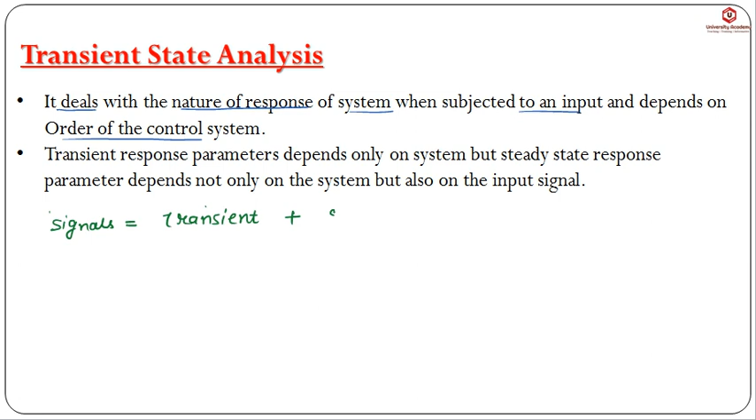ट्रांजिएंट स्टेट एनालिसिस। Transient state analysis deals with the nature of the response of the system when subjected to an input, and it will depend on the order of the control system. In the previous lecture I have told you that signal has two parts, that is transient and steady state. When the transient dies out, the circuit will reach the steady state. So the transient response parameters depend on the order of the control system, and steady state response parameters depend on the type of the system.

What is order? जो characteristic polynomial होता है उसमें जो s की highest power है it will give the order of the system. So it is obtained from the characteristic equation which is 1 plus GH is equal to 0.

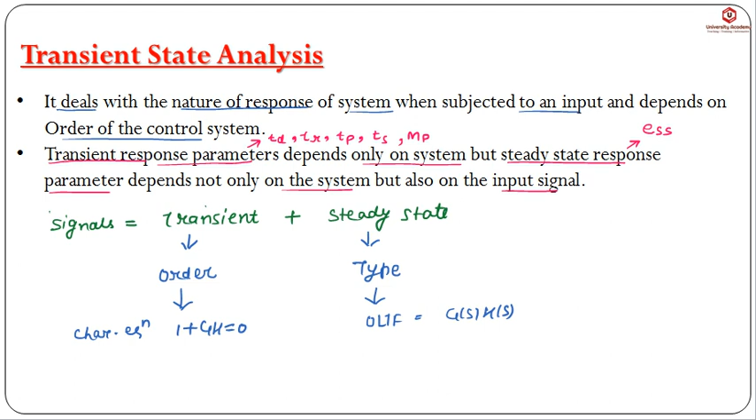Whereas the steady state response parameter is steady state error, represented by Ess. It depends on the system as well as on the input signal we are applying. We will discuss all these parameters in detail. First we will discuss zero order system.

This order of the system also gives us the information about how many energy storage elements are present in the system. जैसे अगर zero order है it means there is no energy storage element present in our system.

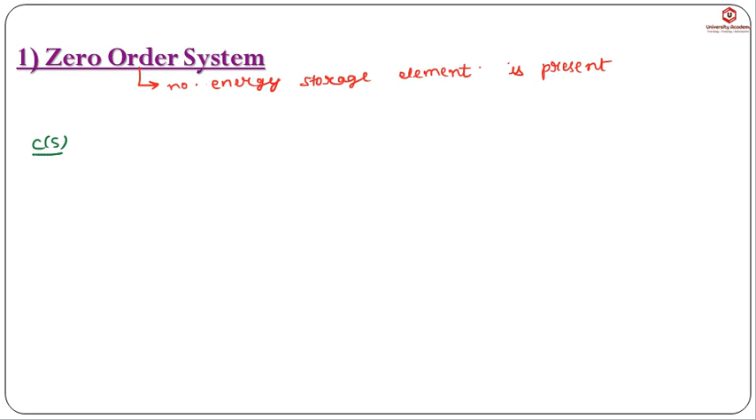So no storage element is present in zero order system. We know that the generalized form of the transfer function, C(s)/R(s): suppose the numerator is constant, and the denominator of the closed loop transfer function gives the characteristic polynomial. Suppose it is of the form a_n s^n plus a_(n-1) s^(n-1) and so on up to a_1 s, and the constant is a_0. So this is the general form of the transfer function where the denominator indicates the characteristic polynomial.

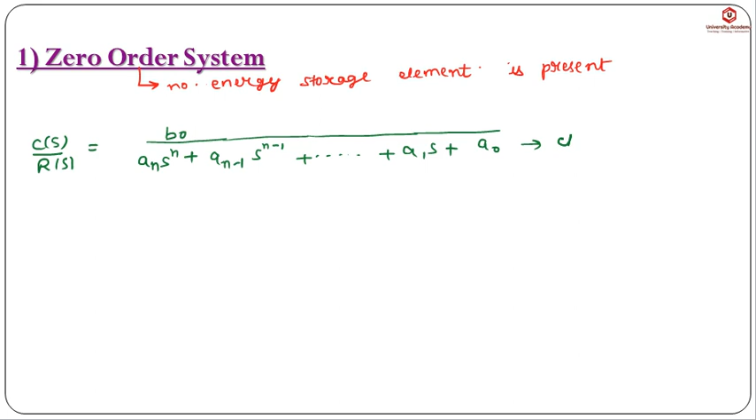So this is the form of the transfer function for the zero order system. This b0 by a0 indicates the gain, represented by K. So K is the gain. If we discuss an example, अगर कोई भी energy storage element नहीं है, it will be a resistive network. Examples of zero order system are potentiometer or resistive network.

We can represent this transfer function in block form. Input is R(s), we get the output C(s), and the block is K. So from here we can see that C(s)/R(s) is equal to the gain of the system, that is K.

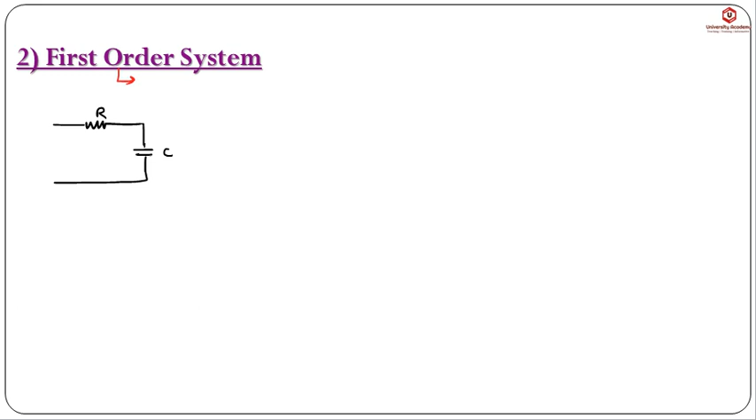Now next we will discuss the analysis of the first order system. So यहाँ पे क्या है कि जो order है वो first है, it means it will consist of one energy storage element. So suppose I am considering a network which is consisting of a resistor and one storage element, that is capacitor, that is RC network I have considered. Okay, so this is resistor and this is capacitor. So we are applying the input, suppose it is R of t, and we are taking the output which is C of t across the capacitor.

So now if we find out the transfer function, that is C of S, then by the voltage division rule we can find out that it will be equal to R

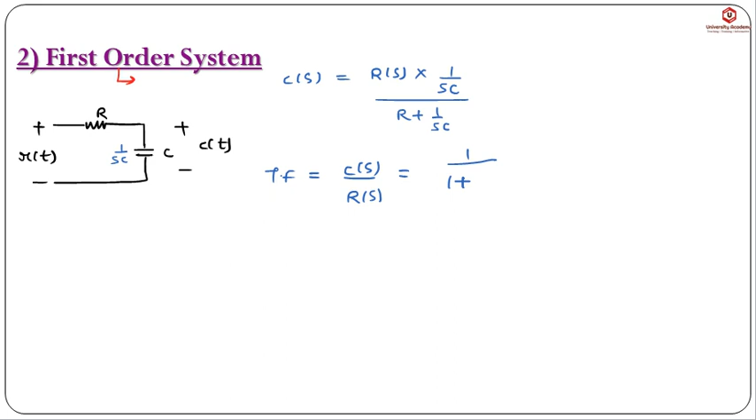It will be equal to 1 upon 1 plus SCR. Okay, so now इस सर्किट का जो टाइम कांस्टेंट है that is represented by T, it is given by R into C. So C of S by R of S is equal to 1 upon 1 plus S into T. Okay, so this is the standard transfer function of first order system, where this T indicates that it is a time constant, where T is equal to R into C.

Now in the first order system we will apply the different inputs: first of all we will apply the impulse, then the step input, then ramp, and then parabola. So first of all we will discuss the impulse response analysis of the first order system. So हमने देखा कि जो first order है उसका जो transfer function है that is given by standard transfer function 1 upon 1 plus S into T. Input we are applying R of S and output we are getting C of S. So C of S by R of S will be equal to 1 upon 1 plus S into T.

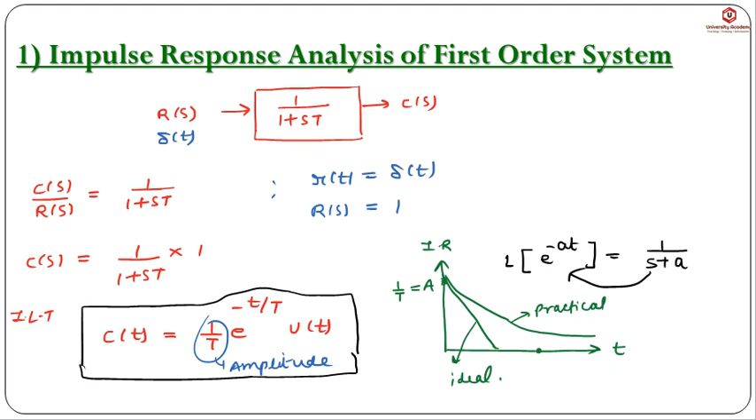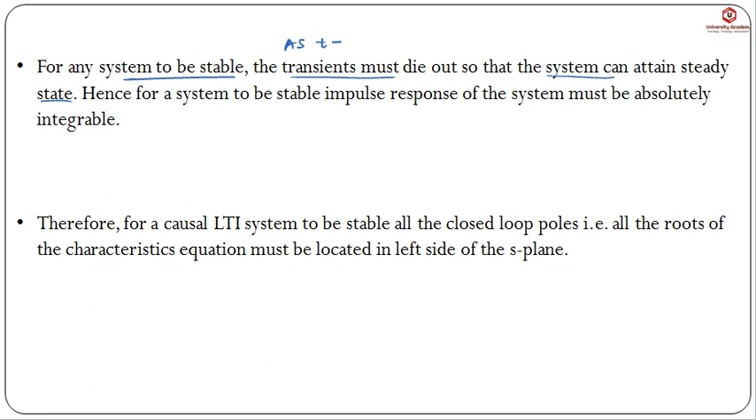So for any system to be stable, the transient must die out so that the system can attain the steady state. So we have seen that as t is tending to infinity, our impulse response is tending to 0. It means the transients are dying out and the system is attaining the steady state. Hence, for the system to be stable, the impulse response of the system must be absolutely integrable. Okay, so for the absolutely integrable signal, if we integrate from 0 to infinity the magnitude of the impulse response, it should be less than infinity.

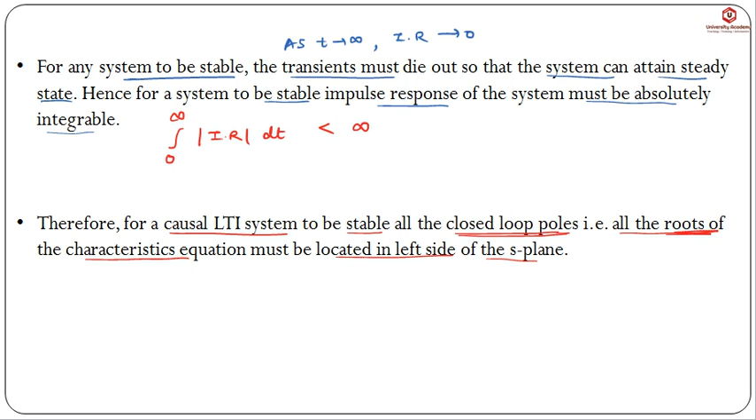Okay. Now therefore, for a causal LTI system to be stable, all the closed loop poles, that is all the roots of the characteristic equation, must be located in the left side of the S plane. Okay. So यहाँ पे क्या है कि जो हमारे closed loop poles हैं, that is nothing but the denominator polynomial. If we solve it, then it will give the roots of the characteristic equation. So उसके जितने भी roots हैं वो क्या है, left half में अगर lie कर रहे हैं, then only the causal LTI system will be stable.

Okay, so this is S plane, that is sigma and j omega. So all the roots of the characteristic equation should lie on the left half only. अगर एक भी root right hand side गया then that system will be unstable. And if the roots are lying on the imaginary axis, that will be known as a marginally stable system. Okay, so for the system to be stable, all the roots of the characteristic equation should lie on the left side of the S plane.

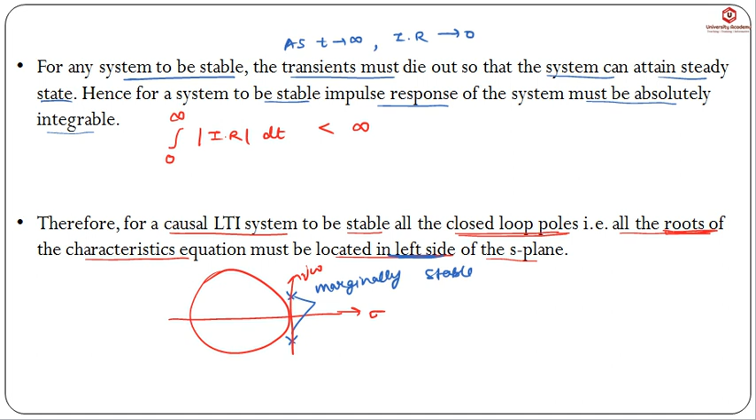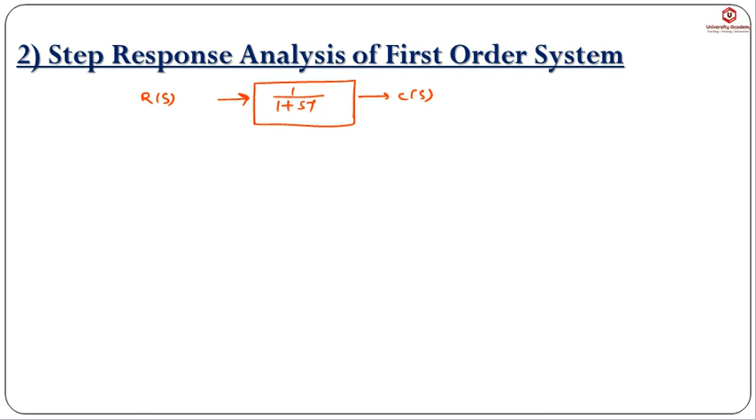Now next let us see the step response analysis of the first order system. So we are having the first order system. इसका जो standard transfer function है that is 1/(1 + sT). Now we are applying the step input. Okay, so that is R(s), output we are getting C(s). So we are applying the input r(t) equal to u(t). So if we take the Laplace transform, since we are applying the unit step input, it will be equal to 1/s. So from here we can find the step response.

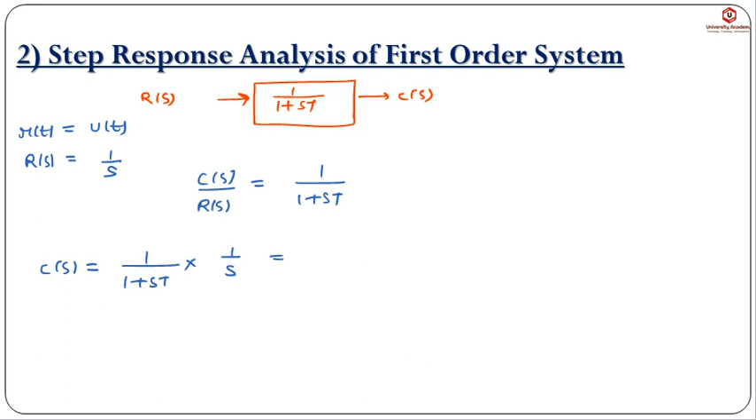So we know that C(s)/R(s), that is the transfer function, is 1/(1 + sT). So from here we are getting C(s) equal to 1/(1 + sT) times R(s), and R(s) value is 1/s. So now we can solve this using partial fractions, then apply the inverse Laplace transform. So we can write it in the form A/s plus B/(1 + sT). Okay, so if we substitute s equal to 0, we get A as 1, and if we substitute s equal to -1/T, we get B as -T.

And after applying the inverse Laplace transform, we get the step response of the first order system as (1 - e^(-t/T)) u(t). Okay, so this is the step response of the first order system, that is 1 - e^(-t/T). So this 1 indicates the steady state response, and this is the transient response. This is the transient response of the first order system when we are applying the step input.

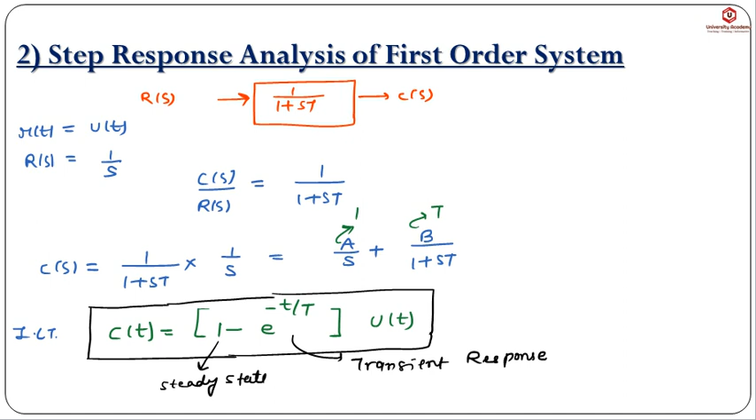So now if we plot this step response with respect to time, this is the step response expression which we have obtained, that is (1 - e^(-t/T)) u(t). Okay, so now let us plot. So on the x-axis we have time, and on the y-axis we have the step response. We have applied the unit step input, which means amplitude is 1.

Okay, so now if we calculate c(0), it means if we substitute t equal to 0, then it will be e^0, which is 1. So 1 minus 1 is 0. It means c(0), that is output at t equal to 0, its value is 0. And if we calculate the output at t equal to infinity, that is under the steady state, the exponent becomes minus infinity, and e to the power minus infinity is 0. So the output as t tends to infinity will be equal to 1.

So it means our step response, t is equal to 0 पे उसकी वैल्यू कितनी है 0, and t is equal to infinity पे उसकी वैल्यू कितनी है 1. So अगर वो आइडियल है, that is ideal curve, if you are plotting, then it will increase linearly, but it is practical, so it will increase exponentially. Okay, so it will increase slowly and it will reach the steady state. Okay, so let me draw again.

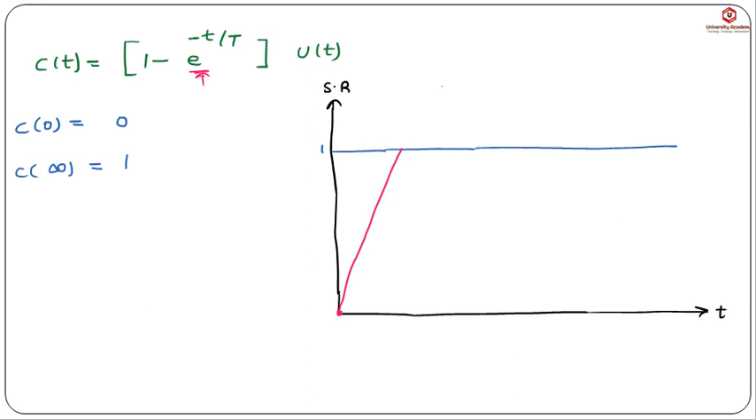Okay, so this is the ideal curve, it will quickly reach the final value, and this is the practical one. Okay, so now let us see the transient response parameters in this curve. So the first parameter is delay time.

So delay time is defined as the time taken by the step response to reach 50% of the final value. तो यहाँ पे final value कितनी है, 1. Okay, so उसका 50%, that is 0.5. So it will be somewhere here. It is 50% of the final value, which is 1 in this case. So that is known as delay time, and it is denoted by td. So td is the delay time, and it gives the amount of time taken by the step response to reach 50% of the final value starting from 0.

Okay, then we have rise time. So rise time is defined as the time taken by the step response to reach 90% of the final value starting from 10%. So this will be the 90% of the final value, which is 1, but starting from the 10%. So this is 10% of 1. Okay, so this time is known as rise time, that is tr.

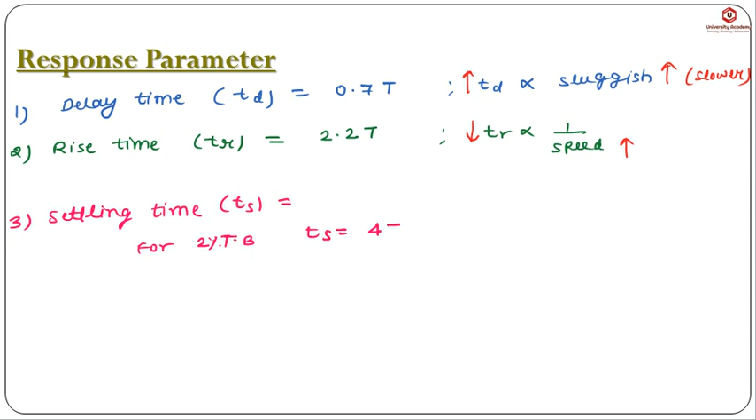Okay, the next parameter we have is settling time, denoted by ts. Depending on the tolerance band, we have the formula. So for the 2% tolerance band, the settling time is given by 4 into T. And settling time is inversely proportional to stability. So if the system is taking more time to get settled, that is more time to reach the steady state, obviously stability will be less.

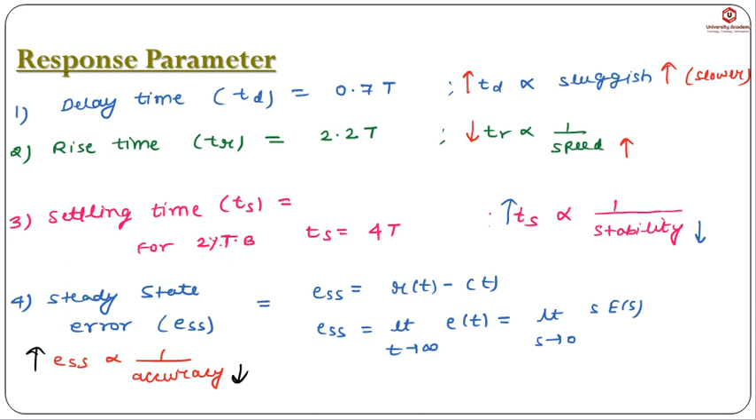So this is the definitions of the transient response parameter which I have already discussed. So पहला क्या है, delay time है. So it is a time taken by the step response to reach 50% of the final value starting from the 0. Okay, and formula is given by, so delay time, it is equal to 0.7 into T. Okay, the next is rise time. So it is a time taken by the step response to reach to 90% of the final value starting from the 10%, and rise time formula is 2.2 into T.

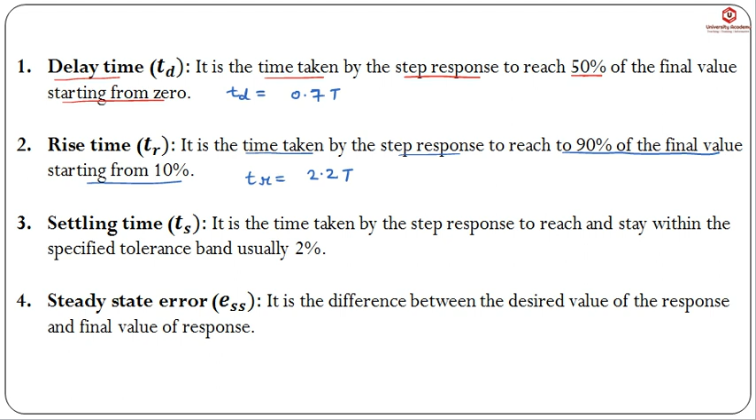Then we have settling time. So it is a time taken by the step response to reach and stay within the specified tolerance band. Usually क्या है, 2% tolerance band question में given होता है. Okay, so for the 2% of the tolerance band, the settling time is given by 4T. And suppose अगर 5% of tolerance band given है, then the settling time, it will be equal to 3T. Okay, so but generally क्या है, we use 2% of the tolerance band.

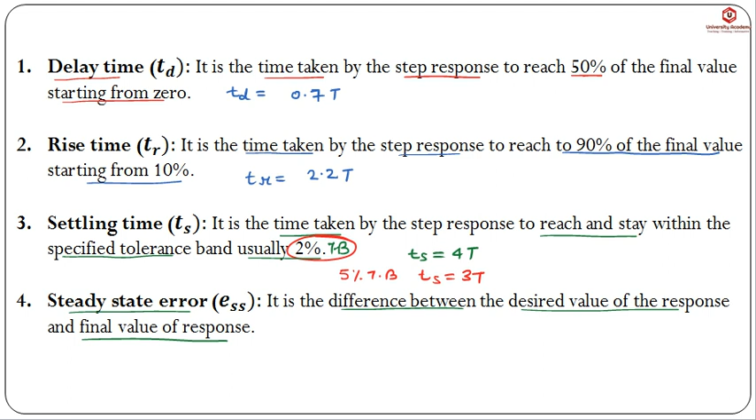And then last is steady state error. So it is the difference between the desired value of the response, that is input, and the final value of the response. So that is steady state error, it is the difference between the input and the output value.

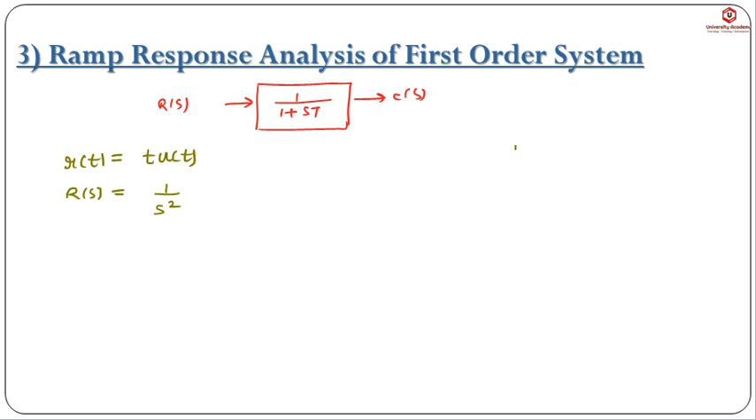Next, let us discuss the ramp response analysis of the first order system. So this is the standard first order system transfer function, that is 1 upon 1 plus sT. So input is R of s and we are getting the output C of s. So input जो हम apply कर रहे हैं वो है ramp input, so that is t into u of t. So now if we take the Laplace transform, then R of s we are getting 1 by s square, because we know that Laplace transform of t power n, it is given by n factorial by s power n plus 1. तो यहाँ पे t की power कितनी है 1, so 1 factorial is 1 by s square. Okay, so this is R of s.

So from here, if we find out C of s expression, that is C of s by R of s, it is equal to 1 upon 1 plus sT. So this implies that C of s, it will be equal to 1 upon 1 plus sT into 1 by s square. So after solving this expression and by taking the inverse Laplace transform, then we are getting the ramp response expression as small t minus capital T into 1 minus of e to the power minus small t by capital T into u of t. So this is the ramp response.

We can expand it further, so this can be written as small t minus capital T plus T into e to the power minus small t by capital T into u of t. So this small t minus capital T, this is indicating the steady state value, and this T into e to the power minus small t by capital T, this is indicating the transient state value. So this is the ramp response expression for the first order system.

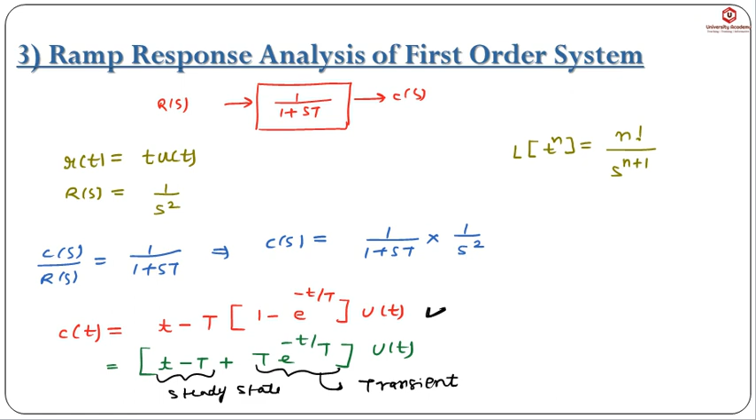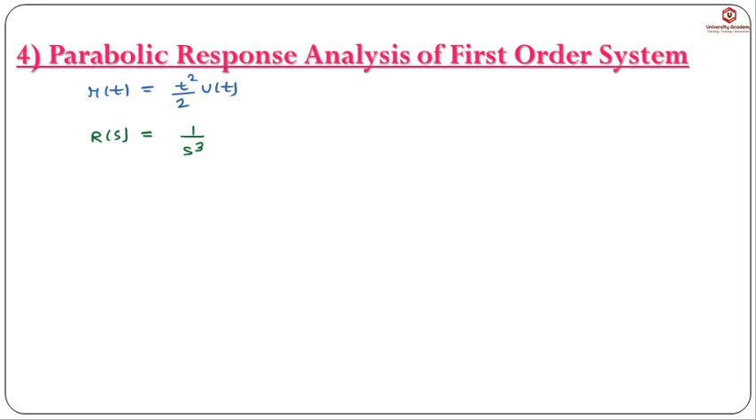Similarly, we can develop the parabolic response expression for the first order system. Okay, so now input r of t, it will be equal to t square by 2 into u of t. Okay, so this indicates the parabolic input. Now if we take the Laplace transform, then we are getting it will be equal to 1 by s cube. Okay, so now first order system में हम parabolic input apply करें, so R of s is 1 by s cube. So from here we are getting C of s, it will be equal to R of s into 1 upon 1 plus sT. So this will be equal to 1 by s cube into 1 upon 1 plus sT.

So we can solve this using the partial fraction, then we are getting the parabolic response as t square by 2 minus capital T into small t minus capital T into 1 minus of e to the power minus small t by capital T, into u of t. So this is the parabolic response expression for the first order system.